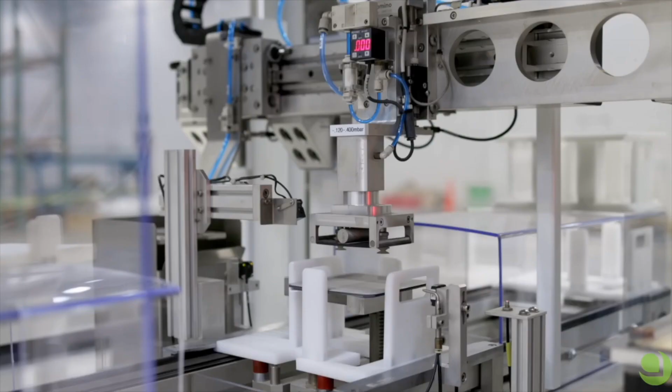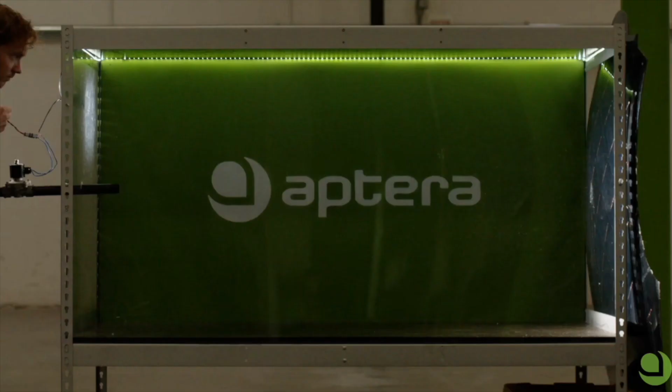I got some good news. Steve Fambro, the co-CEO of Aptera, is actually on a podcast, and this was done January the 8th of 2023. And he's talking a lot of things about where Aptera is as far as production, when it's going to come out, and about their finances. So we're going to get into that.

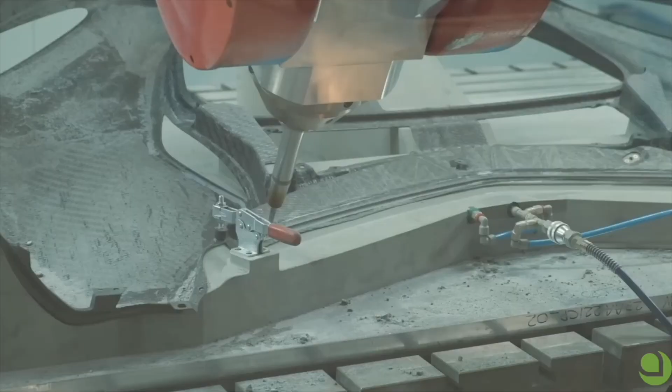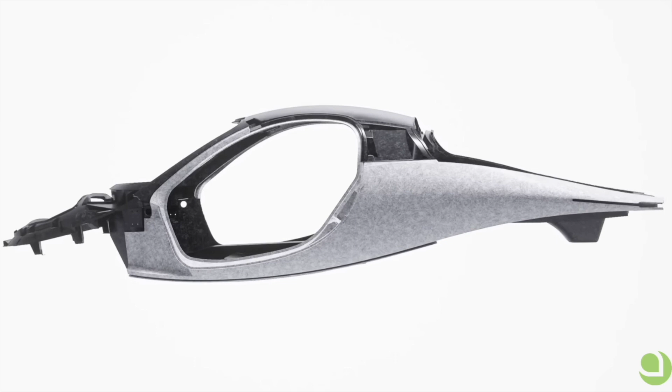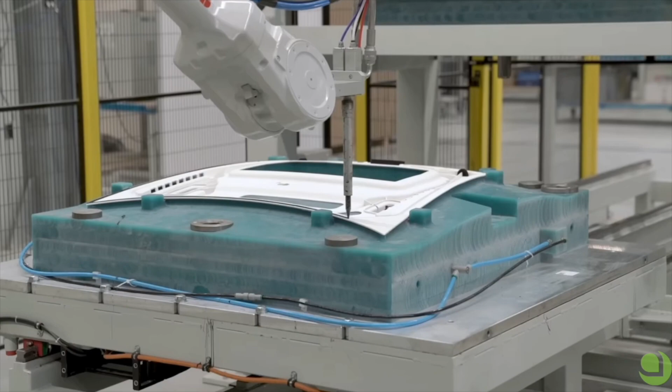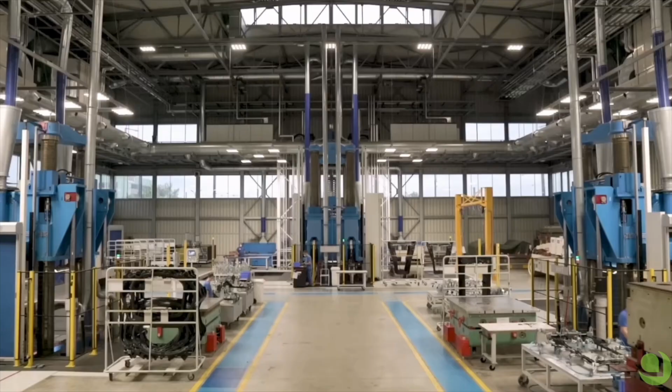You're listening to A Climate Change. This is Matt Mather, your host. I've got Steve Fambro, CEO of Aptera, on the show. Steve, thanks for joining us. Thanks for having me. Well, I want to just give a little background for the listeners as to what Aptera is. It's an electric car company that has been going for a while, and I got interested in it when I saw the cars that you had developed, and that they could be charged directly from the sun, and that they had the photovoltaic cells on the car, and it kind of looks a little like a spaceship. And then I read further and saw that you are shooting to have batteries that have a charge that could last for 1,000 miles for one charge, which also is kind of a bit revolutionary. So tell us a little bit more about this revolutionary car that you've been developing at Aptera, and when are we going to see it on the road?

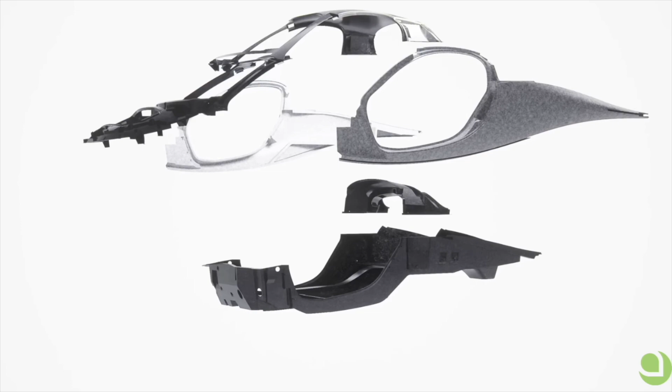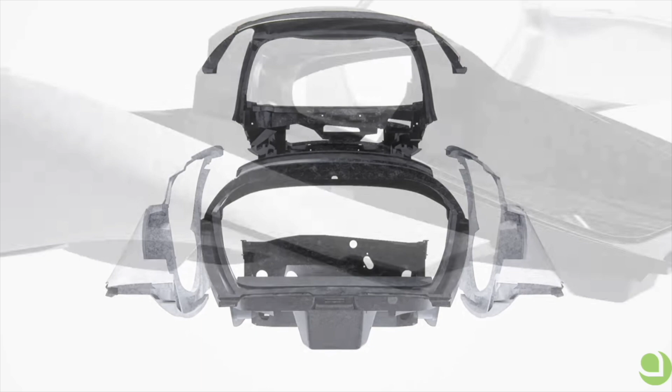Sure. Just to set the timeline. So Chris and I actually restarted the company in 2019. We had started Aptera originally back in 2006, and we raised some money, brought in a professional management team, and it just didn't work out. So we left the company, and he went on to start a battery company, Flux Power, and took it public. And I got into farming because I love food. And that took me to the Middle East, where I did some work for one of the big families there, and came back to the U.S. with my family in 2017, and we restarted Aptera a couple of years later because we saw that the market had changed, that electric vehicles weren't just a curiosity, that everybody wanted them, and they couldn't make them fast enough.

How we got the 1,000-mile idea was after we did some analysis on the sales of electric vehicles. We saw that among several factors, range was one of the big driving factors in sales volumes. And so we thought, why not maximize the range as much as possible? And we did some calculations and determined that with some of the newer battery formats, the larger 4680 series cells, we could pack in enough batteries, just about 100 kilowatt hours, to go 1,000 miles. So that's how that happened. So where are you at currently in development, and when can we expect to see the first cars out on the road for purchase?

We've just finished a major design lockdown on basically every subsystem, but most importantly, the body in carbon. And that's key because it's the largest, most expensive tooled surface of the vehicle. Lots of other things can be adjusted after the fact. You know, if a bracket doesn't fit, then we can make a new bracket or adapt it somehow. But getting the suspension, the closures, as they're called, doors, windows, that kind of thing, and the body in complete design lockdown, that's what we've been working on for the past year. We've just passed that milestone.

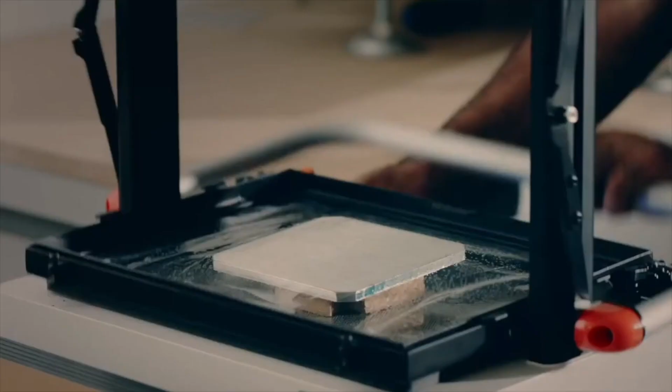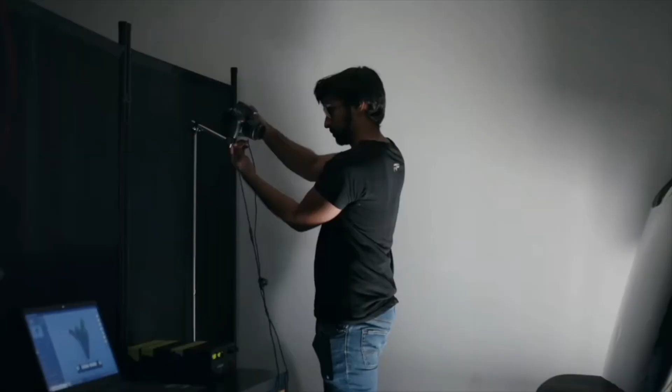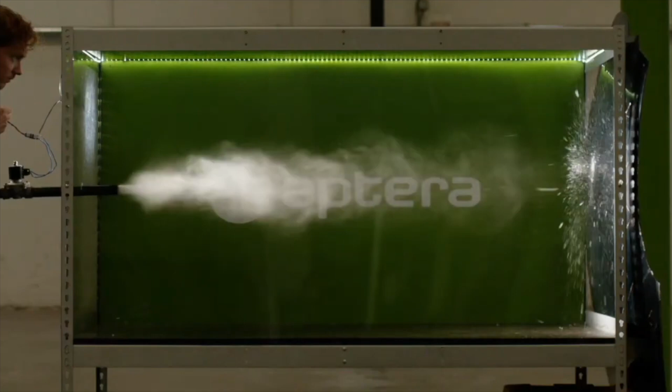So now, I'd say 6 months ago, we purchased some very expensive blocks of tooling steel from Germany. They're massive, they're bigger than people. And the steel is going to be machined into tools in Italy at our supplier, CPC. So those blocks had to be purchased about 6 months ago because of how long it takes. They've just been delivered a couple of weeks ago. And very soon they're going to start machining those tools to begin making the body structure. And we expect the first test bodies to roll off the line mid-year this year, and production vehicles ready to be sold by the end of the year.

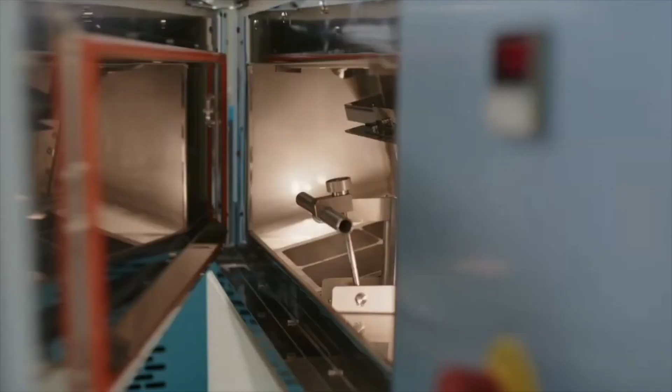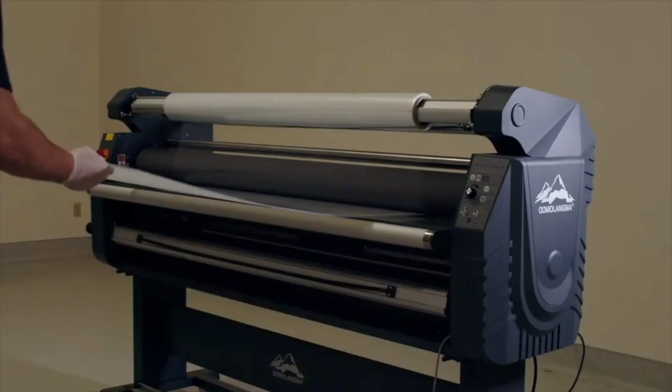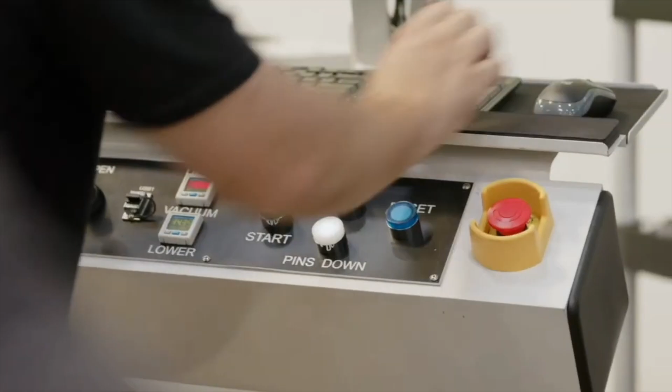Okay, so right here, he said that they actually bought tooling steel blocks, and they did that 6 months ago, and that CPC got them several weeks ago. So back in June, they got the blocks, and then probably around the beginning to middle of December, CPC received the blocks, so they can start cutting them out, which is very good.

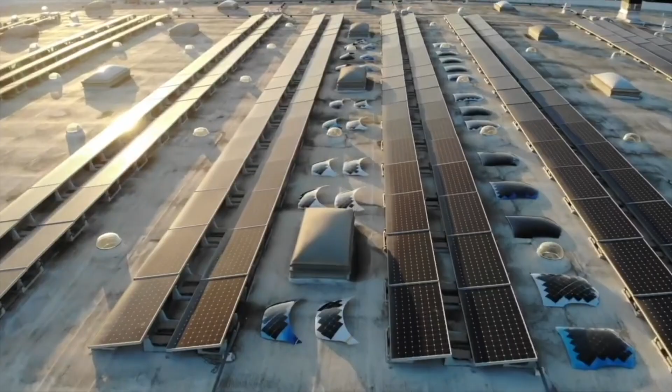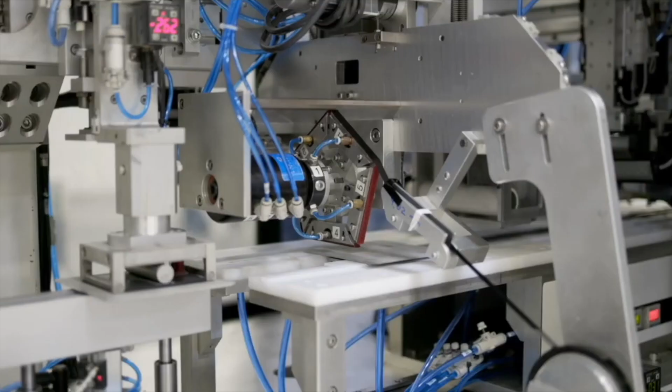But he also said that they don't expect to start having them produce until the middle of this year. So we'll probably be waiting until early May, June before we actually even see a physical Delta. Hopefully not, but we'll see. All right, let's see what else you got to say.

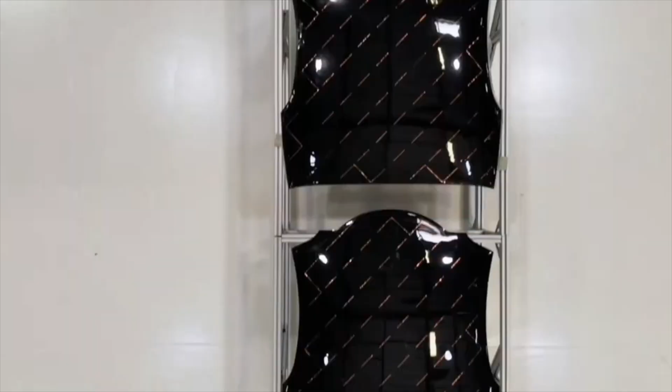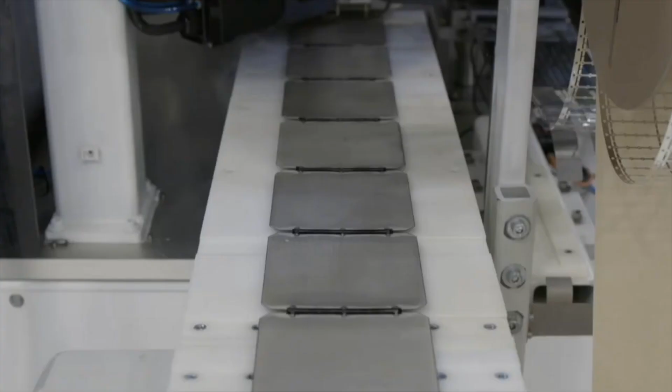Wow, that's moving fast in comparison to in the car world. It takes years to kind of design and create a new car, from my understanding. Tell us a little bit about the photovoltaic cells that are on the car.

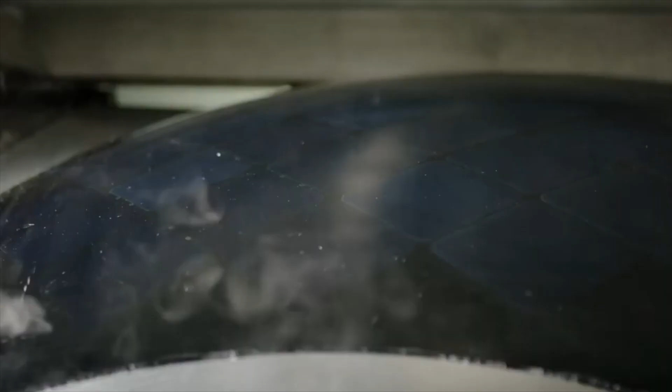And I'm gonna pause it right there for a second because Matt Mattern, he's actually right about that. It takes a long time to get geared up to produce a car because they're actually working with steel. But since Aptera is working with composite, it's so much simpler, as I brought out in one of my videos. All right, let's go on.

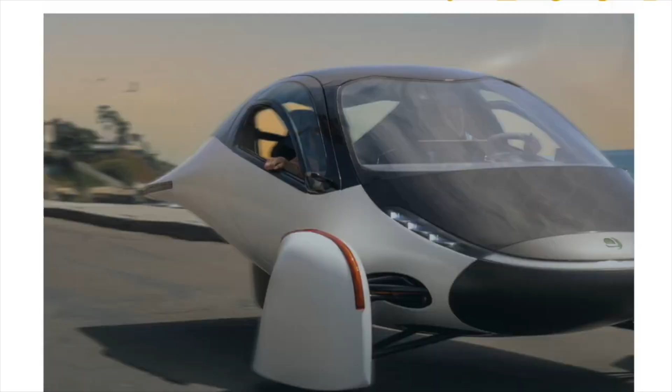How those will work, and how much electricity is likely to be generated from them, so that this car can go without plugging in to operate. Yeah, we use Maxeon cells. And when we restarted the company in 2019, the state of batteries and solar cells had made massive improvements. These cells didn't exist back in 2006 when we first started the company.

And so once we discovered these cells, and once we figured out a way to bend them in part of a structural panel, we calculated how much energy we could get just from having the roof solar. Chris and I, I had MATLAB on my computer, and we were doing these calculations, simulations. And we said, we could get a couple of miles extra range a day if we have this solar roof. Isn't that great? And then the light went on in our head.

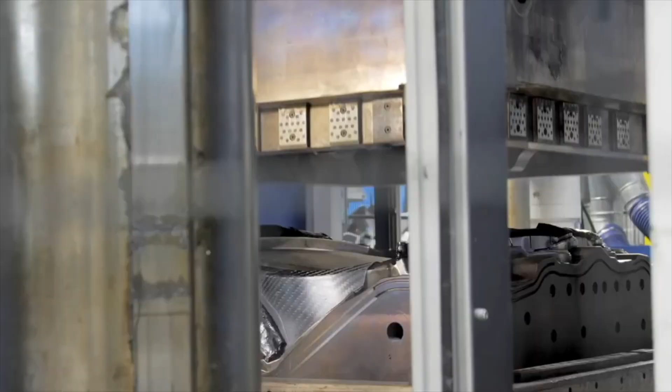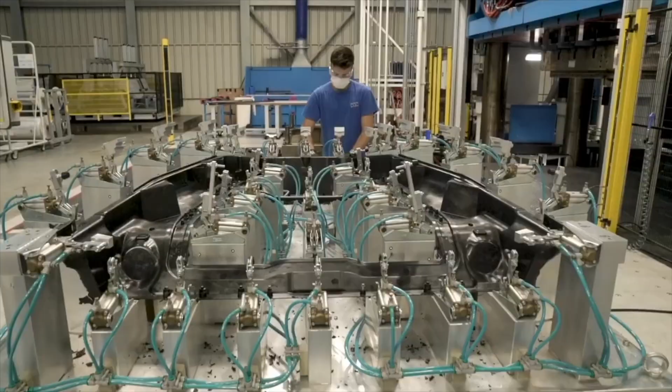Our body's surface is so smooth. Why not, how much could we get if we covered the whole body in solar cells? And so that was the genesis behind that. And we determined that we could get a peak solar power of about 700 watts, and over a period of a day, about 4 kilowatt hours.

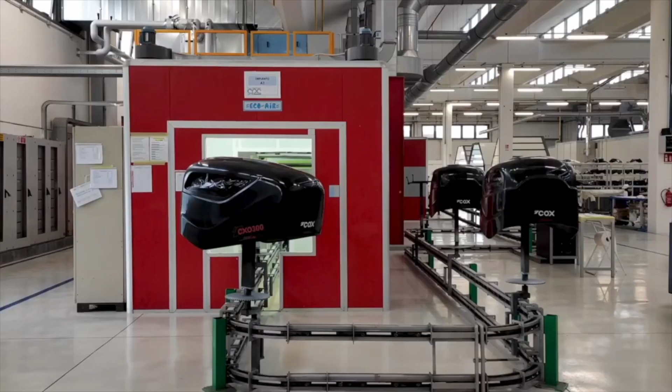And because our vehicle's so efficient, we use 100 watt hours per mile compared to like the new Hummer. I think it uses 700 or 800 watt hours per mile. Because we're so efficient, 4 kilowatt hours translates easily into 40 miles. And so that's how we came up with that.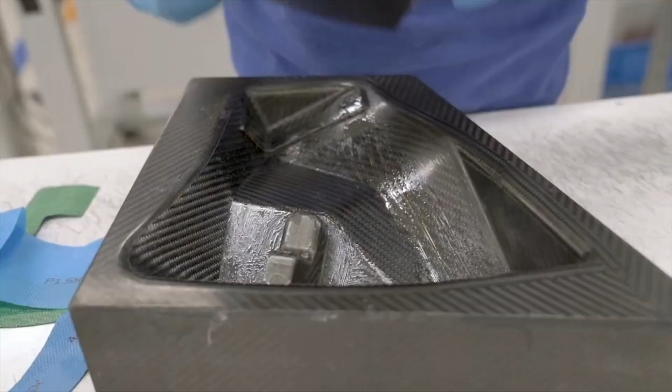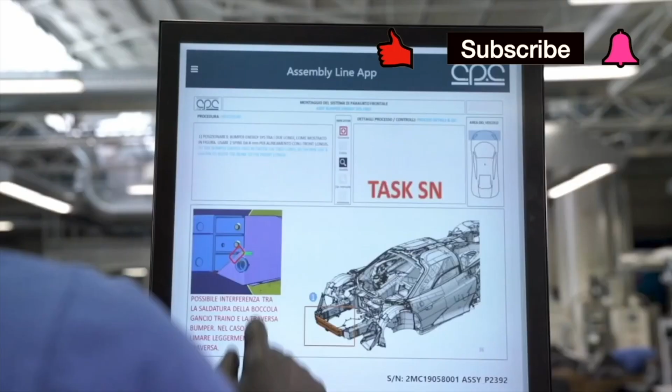And once we committed to that, the solar actually became the largest part of our IP portfolio. It's the most research intensive part of our business because nobody's doing what we're doing the way we're doing it. There are some other companies with solar cells on the vehicles, but our panels are, I think, the lightest weight, probably the lowest cost, most robust.

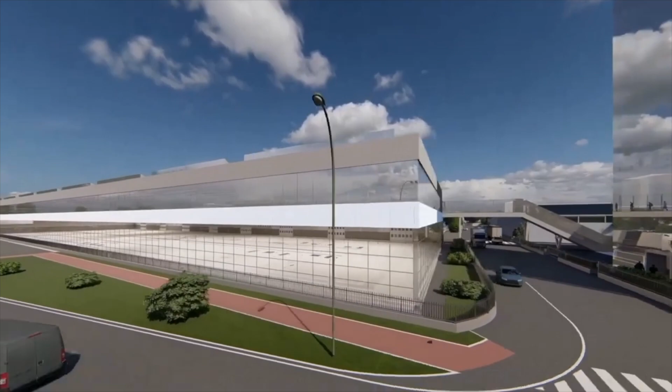They're very damage tolerant. You can put a bullet through it and it'll still produce power. It'll just be reduced by a little bit. You can hurl ice cubes at it and softballs and it still keeps functioning. So developing that and then making it manufacturable at high scale, and then making it to automotive standards where it's going to last for 10, 15 years, vibration, salt, snow, freeze thaw cycles. That's been a large part of our R&D effort.

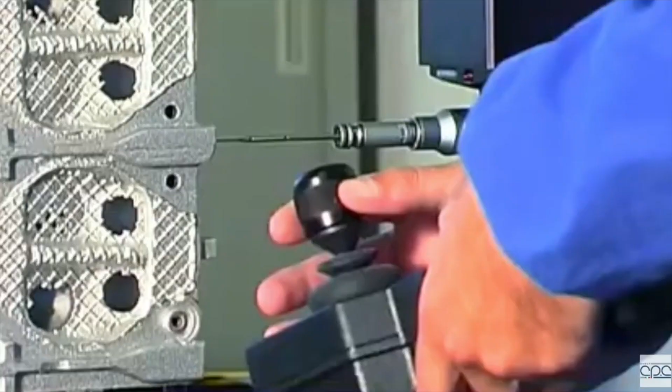Well, that is a fascinating possibility to get 40 miles from just sitting in the sun. And obviously, there are certain parts of the country and in the world where we get a lot of sun, and you could do almost all your driving without ever plugging the car in, just having it sit in the driveway or on the road picking up energy. So that could be revolutionary. I assume this is just the start in terms of you're at 40 miles now. I assume it's going to go up over time.

Yes. And this is one of the things that really drew me to Aptera, because the energy that you're using, you can actually replenish for free, getting your solar power from the sun.

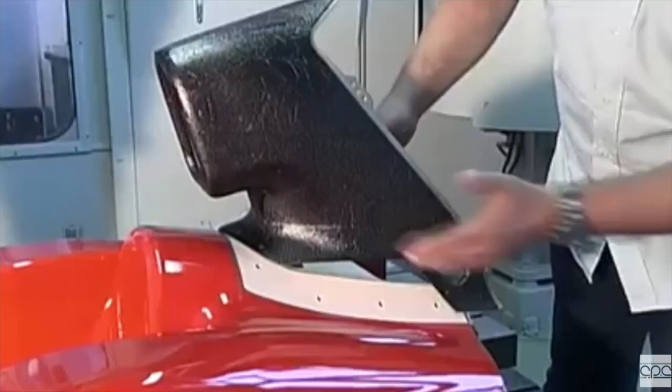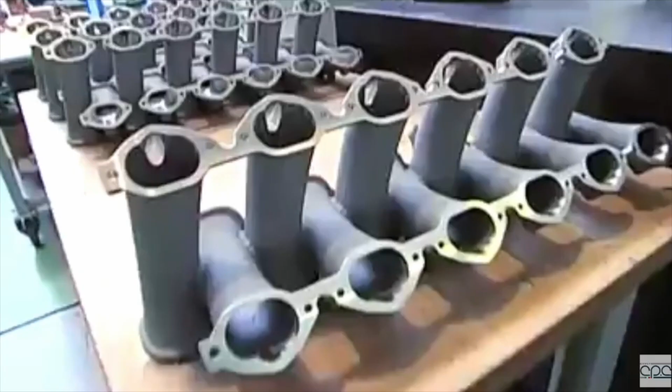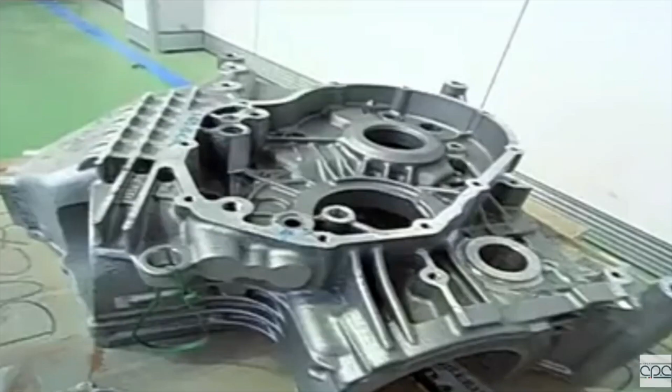And Aptera is just an awesome car. This is just such a beautifully well-made car that if you're not excited for this vehicle, I don't know what to say. Just don't know what to say. But I am, and I'm going to get mine. All right, let's go on.

The solar cells are going to get more efficient. We're also going to have different models with different amount of surface area.

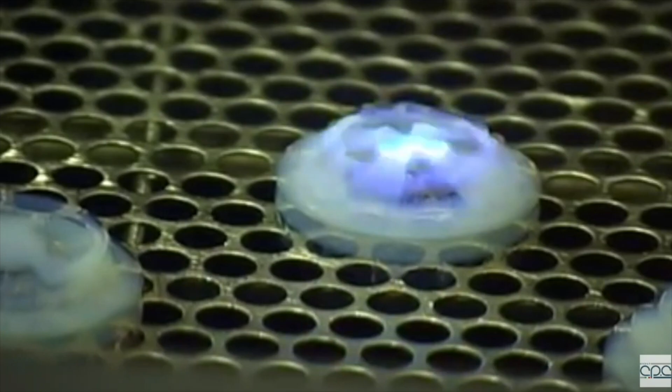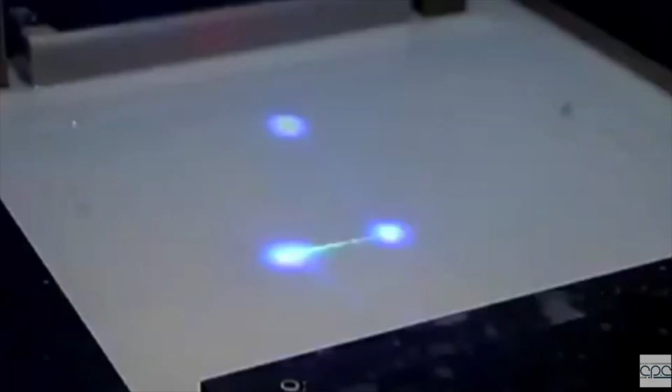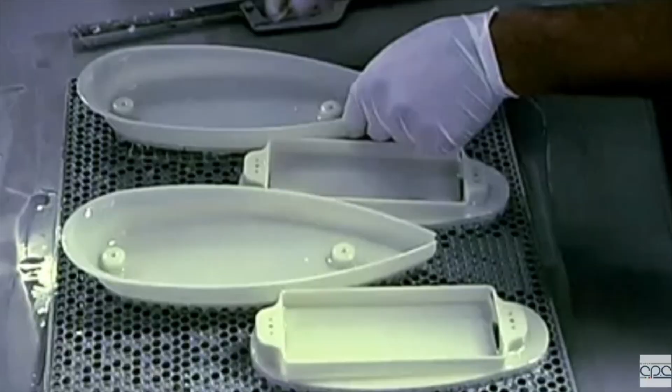And we're also working with some other companies to commercialize sort of a fledgling solar mobility business, leveraging our technology for other customers and looking to monetize that. So it's not just our vehicle, it's other vehicles, it's other applications that our solar can really help lower the impact of electric vehicles on the grid.

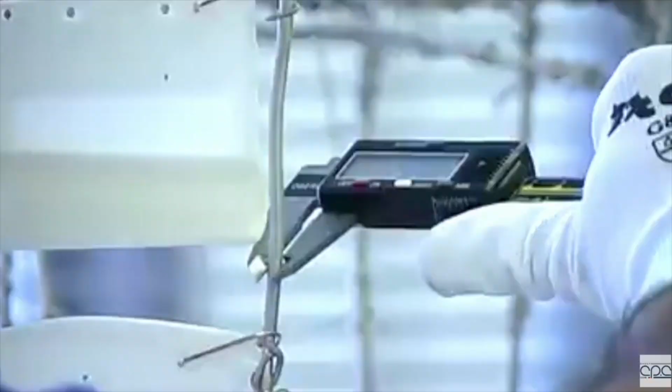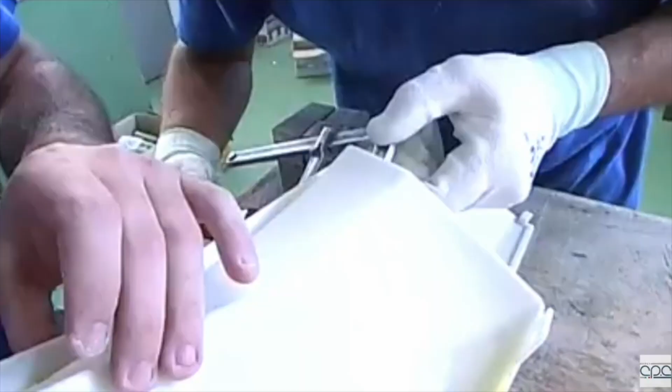By doing this, we're able to deploy lots of electric vehicles and electrify lots of things without necessarily having to worry about bringing the grid along to modern standards. Sure, we need a modern grid, of course, but not having it is not a reason to wait on electrification. And that's really one of the benefits of Aptera. And that's another thing too. We know that 10 years down the road, the solar cells will be more efficient because they're getting more and more efficient every year. And looking forward to that.

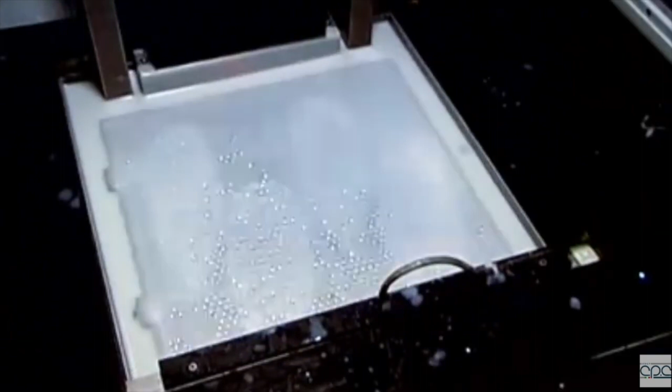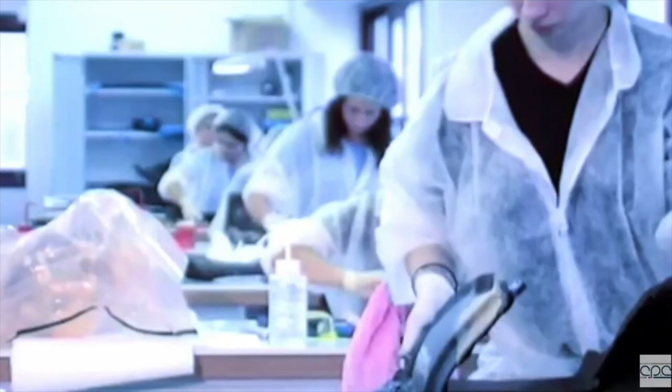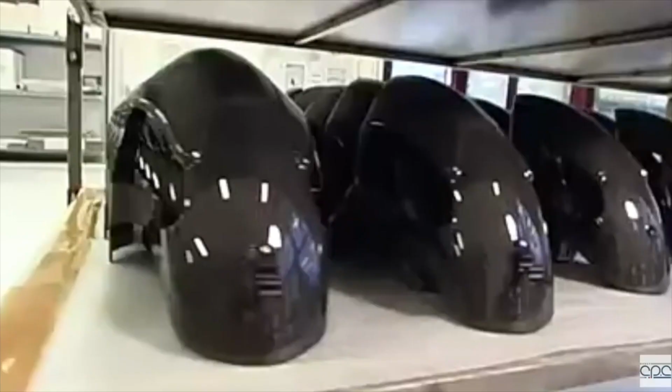Okay, let's go. So in terms of financing a car company like this, I understand there's a tremendous amount of capital that's required to launch this. Where is the company at in terms of its current capital and what its needs are going forward? Elon Musk, I think, called his factories money furnaces or something like that. We're not at that stage yet. I don't think we ever will be because our vehicle is fundamentally different than a car.

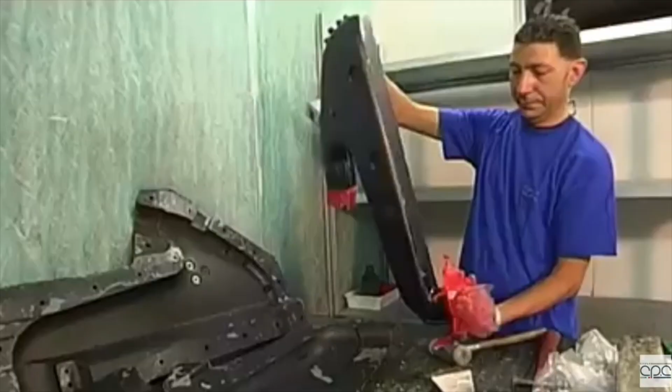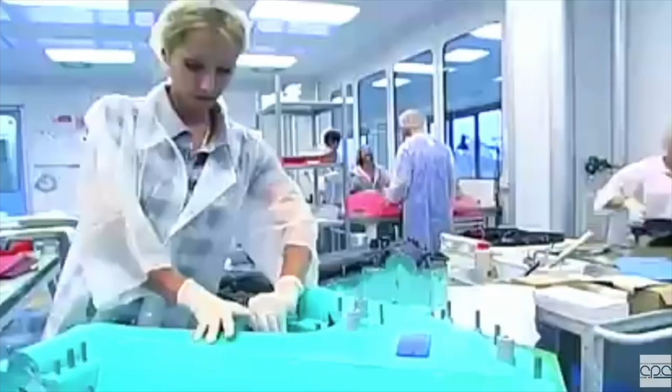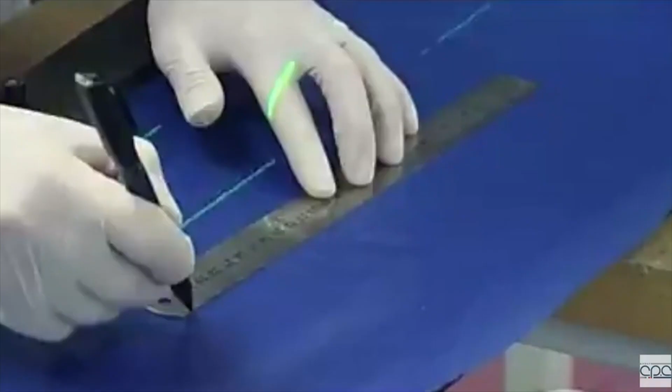A typical car body, or body in white, as it's called, has 200 structural pieces that all have to be fixtured and welded together and held dimensionally constant during that process. Our structure has 6 pieces. So fundamentally, we're just clicking 6 pieces together as opposed to trying to hold 200 pieces together and keep them aligned. So our development time for the body is shorter. Our assembly line cost is less. Our tooling cost is less. Everything is different because of what we call the new steel, the pressed carbon.

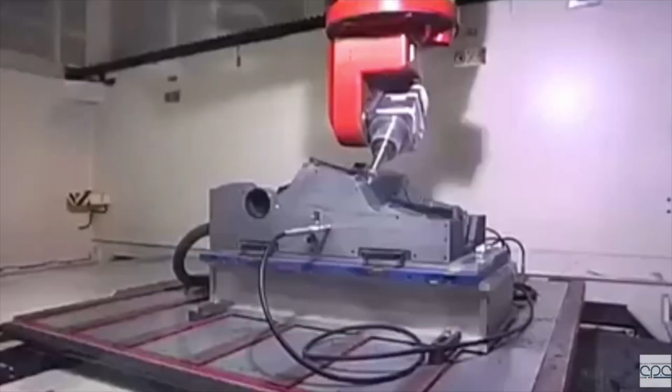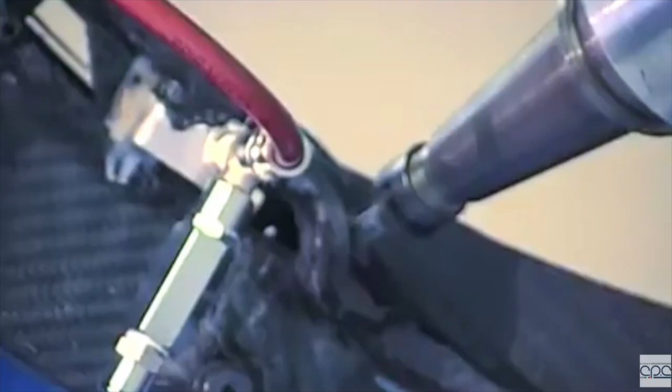You don't have any labor in this part. You're not having to put fiber in the thing. You basically just put a block of carbon paste in the mold. It squeezes shut with 5,000 tons force, add some heat, and 3 minutes later, a structural part comes out ready to use. So fundamentally, our costs are different because they're lower because we have fewer parts and fewer tools.

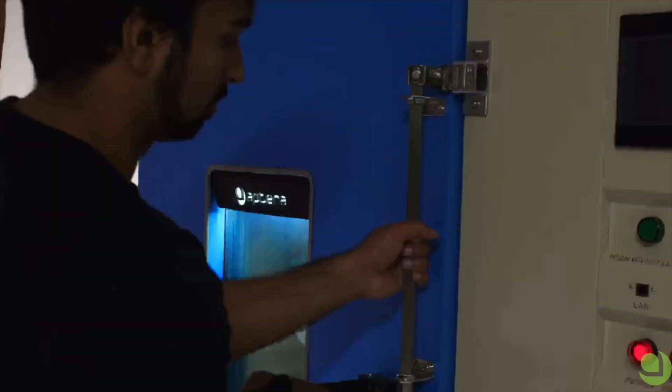That said, to date, we've raised about $100 million, and that $100 million has let us develop the vehicle from scratch with all the other attendant technologies, the solar, as I mentioned, the solar electronics, the battery. We made an acquisition last year of a company that makes displays and the software because they did a much better job than we could. And we've been able to do all of that on less than $100 million. To get to production, we're out in a Series B raise right now for $150 million. And we've got folks in Saudi Arabia and the United Arab Emirates, in Europe and the United States that we're talking to that all want to be a part of this.

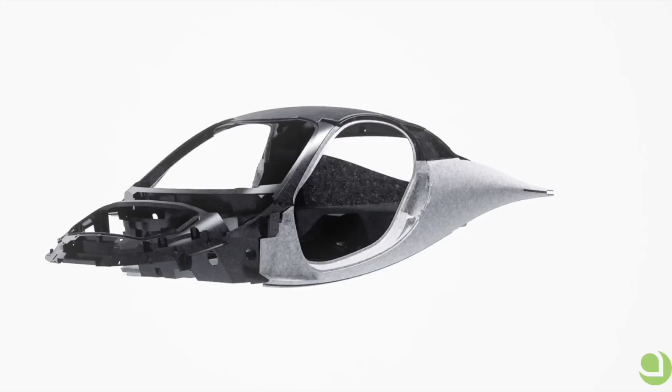Well, it's an exciting future that you're talking about here. You're listening to Climate Change. This is Matt Matter, your host, and I've got Steve Fambro, CEO of Aptera, on the program. Aptera, a new solar electric car company, and we'll be right back with Steve to talk more about the revolutionary technology that his company is bringing to the market soon.

Okay, so I'm gonna stop right there. But yes, I actually talked about how simplified Aptera is with their manufacturing. I actually did two videos on that and how they can put the Aptera together without using a lot of heavy machinery or a bunch of robots to weld it or even to paint the vehicle. And so with that being so simple, they don't need as much money to set shop up, so to speak. And it sounds like he's got a lot of other individuals that are interested in Aptera from around the world, like in Saudi Arabia. So there's no doubt in my mind that they're going to come out with this.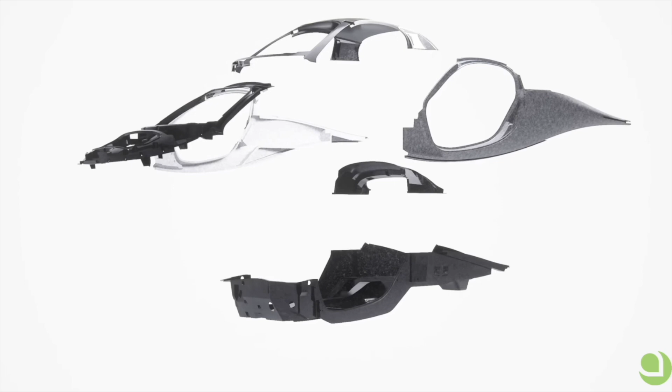And I just want to say, I'm going to end this right here, but I am actually going to come out with another part of this. So this is actually part one. I'll be coming out with part two very soon. So be on the lookout for it.